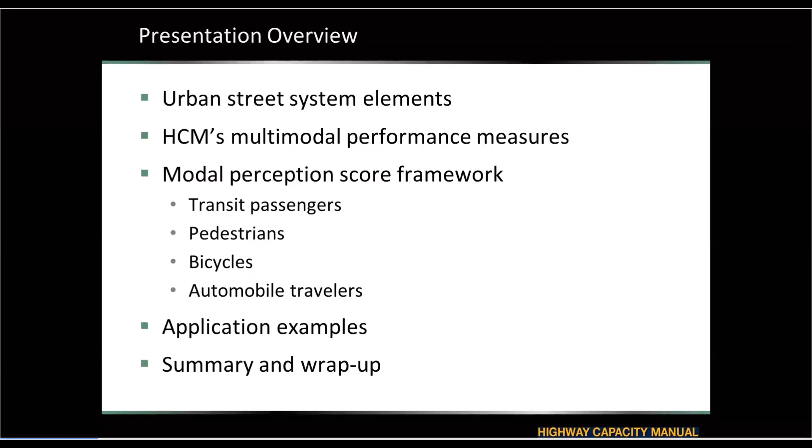Then we'll move on to looking at one specific performance measure, or set of performance measures, the modal perception scores that can be evaluated for transit passengers, pedestrians, bicycles, and automobile travelers. These perception scores are really the heart of the multimodal evaluation process in the Highway Capacity Manual, and what can be used to support a complete streets analysis.

Aaron will give some application examples. We have 3 case studies of how these measures have been applied to actual projects. Then we'll provide a summary of the webinar and information about future research needs and resources available for people who want to know more about this method.

So we'll start first by going through the different urban street system elements that are defined in the Highway Capacity Manual.

So there are 4 main types of urban street elements. Obviously, one of the things you can find along a street are intersections. They can be signalized intersections, stop-controlled intersections, roundabouts, interchange ramp terminals, and alternative intersections. These are all covered in chapters 19 through 23 in the Highway Capacity Manual. These are the focus of the next 2 webinars, numbers 6 and 7. So we won't go into great detail about intersections in this webinar other than to describe how they fit into a multimodal analysis of a larger urban street.

One step up in the hierarchy of urban street system elements are links, which are the section of street between major intersections. You can also do an analysis of what we call a segment, which is the combination of a link and a boundary intersection at the end of the link. And then finally, you can combine multiple consecutive segments together to evaluate the urban street as a facility. We've already looked at urban street reliability as part of webinar 4, and the final webinar in the series, webinar 8, will look at urban street facilities in more detail. So the main focus of this webinar will be on the links and segments, although we will also cover intersections and facilities to the extent that they are incorporated into a multimodal analysis.

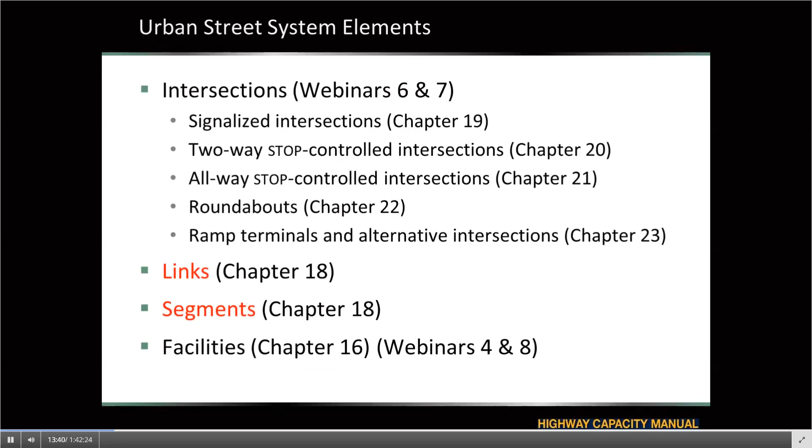So the first system element I want to talk about are boundary intersections. Boundary intersections divide an urban street into segments, and the HCM defines these as any intersection where traffic control can require the street's traffic to stop or yield. These are typically traffic signals, roundabouts, or all-way stop controlled intersections. In the case of the urban street in the aerial photo at the bottom of the slide, there are 2 signalized intersections that are the boundary intersections for this segment. We're going to use this particular section of street quite a bit during this first half of the webinar to demonstrate different aspects of the method and different definitions.

Now, this definition of boundary intersection does not include signalized crosswalks, signals at fire station driveways, railroad crossings, drawbridges, or other similar places where you might occasionally find traffic signals. And you might also say, well, what about crosswalks? Those can provide a legal obligation to traffic to stop or yield. And that is actually true, but for the purposes of the HCM definition, crosswalks do not create a break or a boundary intersection.

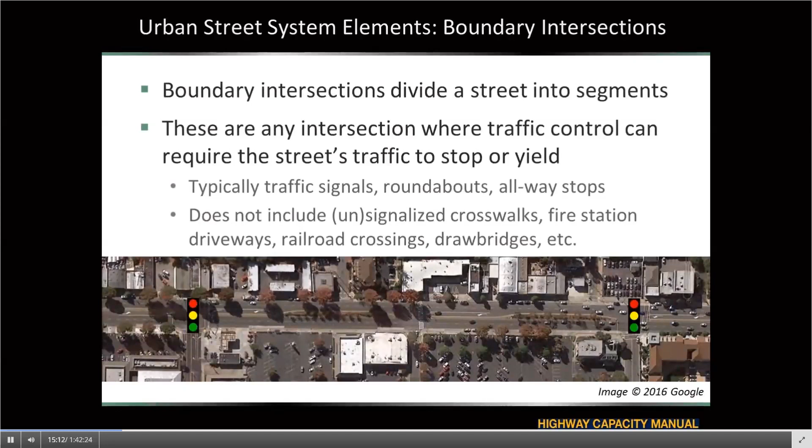Boundary intersections are just one kind of intersection that you can find along an urban street. And boundary intersections being the major intersections where both the major street traffic and the side street traffic may have to stop, the HCM allows you to analyze the operations of both the major street and the cross street. But there are other intersections along an urban street that aren't boundary intersections. These are, for example, intersections where only the side street is stop controlled. You also have a number of driveways typically along an urban street. At these locations, the HCM will allow you to analyze the turning movements onto and off of the major street, as well as movements crossing the major street, whether they're automobile or pedestrian movements. The analysis of intersections in general will be the topic of webinars 6 and 7.

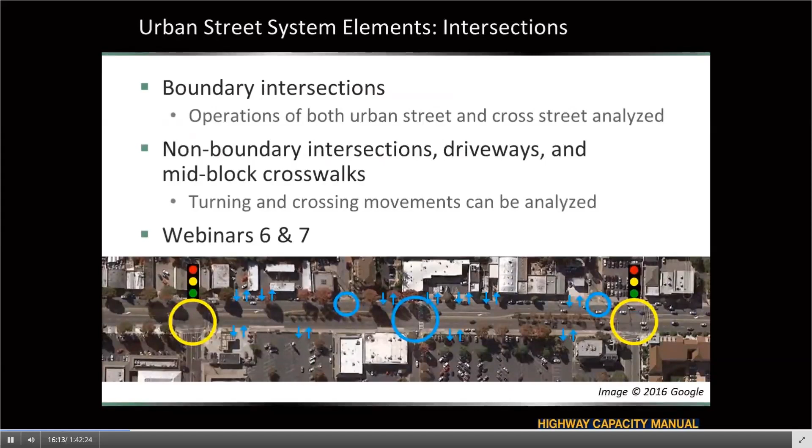Continuing on, the next type of system element are links. These are the portions of a street in between boundary intersections. As you can see here, we have links in both directions of the street. In this case, north is on the right-hand side of the picture. So we have a northbound link and we have a southbound link. It looks at the operation of the street in between the two signalized boundary intersections. Links, as we'll see, are particularly used in pedestrian and bicycle analysis, but not really for motorized vehicle or transit analysis.

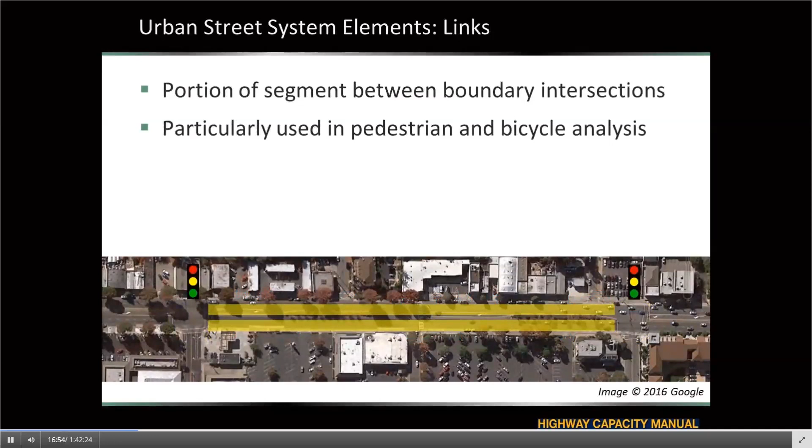And we can take links and their boundary intersections and combine them into segments. Segments are measured from the stop bar of one boundary intersection to the stop bar of the next boundary intersection. So you can see there's a little bit of difference depending on which direction you're looking at, which boundary intersection are you looking at in terms of evaluating the performance of the segment as a whole. So for the southbound, or right to left, portion of the street, we're looking at what happens when you are able to enter that first intersection, continue down the street, and then, for example, if you're looking at travel time down the street, how much delay do you experience at that downstream intersection before you can actually enter it?

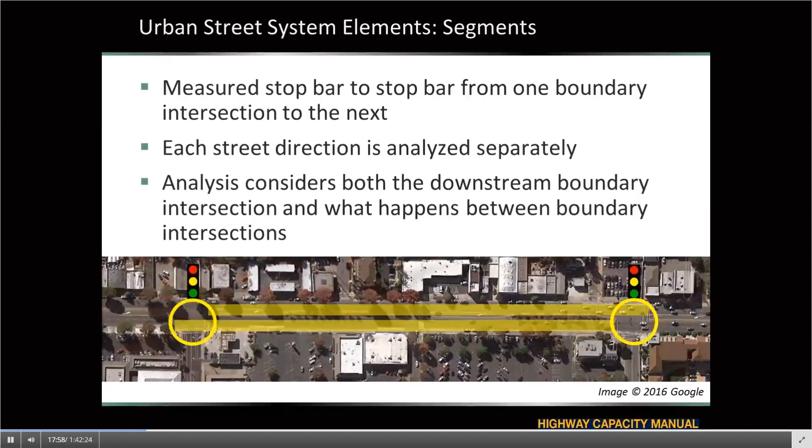For an urban street analysis, each street direction is analyzed separately for each mode. You can also combine multiple consecutive segments together to form a facility.

The general guidance the Highway Capacity Manual provides on starting a new facility is when a change occurs in one of these characteristics, or a significant change occurs: a change in the cross-section, particularly the number of through lanes, a significant change in traffic volumes, a change in the density of land uses along the urban street, or changes in the posted speed or vehicle speeds in general.

So here we have, for example, five segments that form a facility. We break the facility on the right-hand side because you have an adjacent freeway with ramps that change the traffic volumes along the street. You also have a rapid transit station there and some larger retail along the street than you have along the rest of the street, so it would be a good place to break the street and start a new facility.

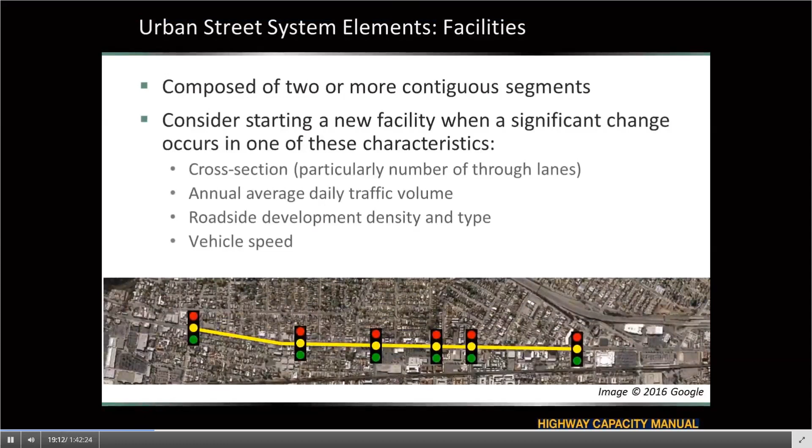Which system element should you study when doing an urban street analysis? The answer depends on what the study area is for the analysis and what the purpose of your analysis is. For example, if you're preparing an access management plan or conducting a multimodal corridor analysis, you would typically look at a facility and all of its sub-elements, the segments and the boundary intersections.

If you're doing a traffic impact study, you typically look at the intersections along the street, and depending on the requirements of the jurisdiction where you're performing the study, you might also need to look at segments.

If you're doing a district or citywide pedestrian and bicycle plan, you might just look at links if you're interested in evaluating the operation or quality of service of the pedestrian and bicycle network on a large scale, where you don't want to put a large amount of effort into any one street section, but want to look at a large area as a whole. You might look at links.

If you're doing a more narrowly focused plan, then you might also look at intersections and segments.

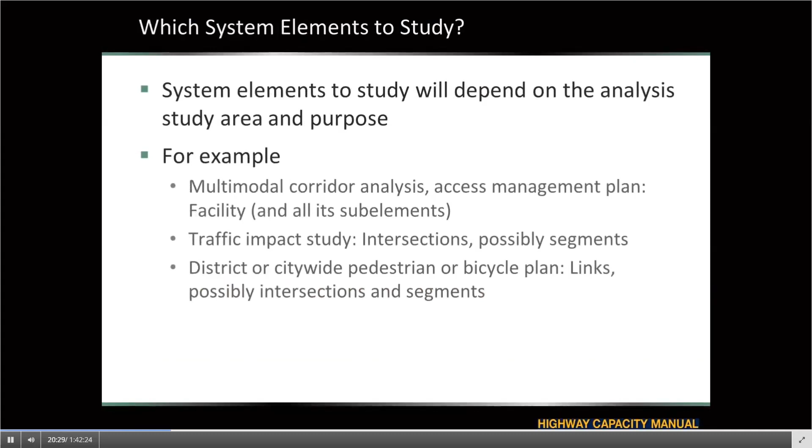Now that we've defined the different system elements that make up an urban street, we'll take a look at the full range of multimodal performance measures that the Highway Capacity Manual provides.

The HCM can also provide a level of service letter, and for some of the modes, it can provide other useful performance measures. So let's start off by looking at the motorized vehicle mode.

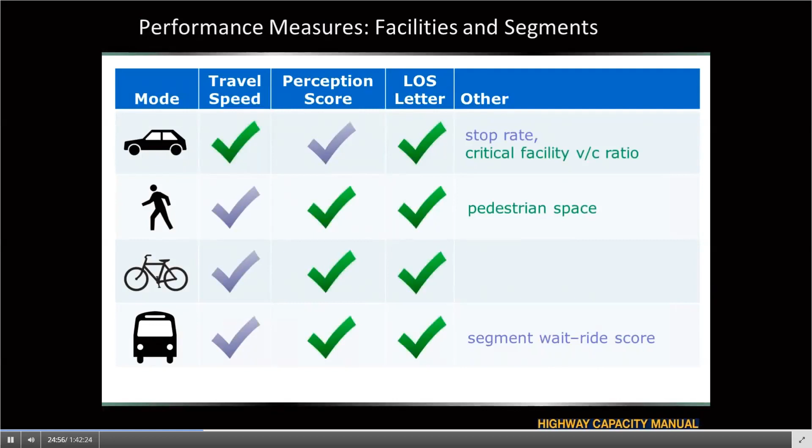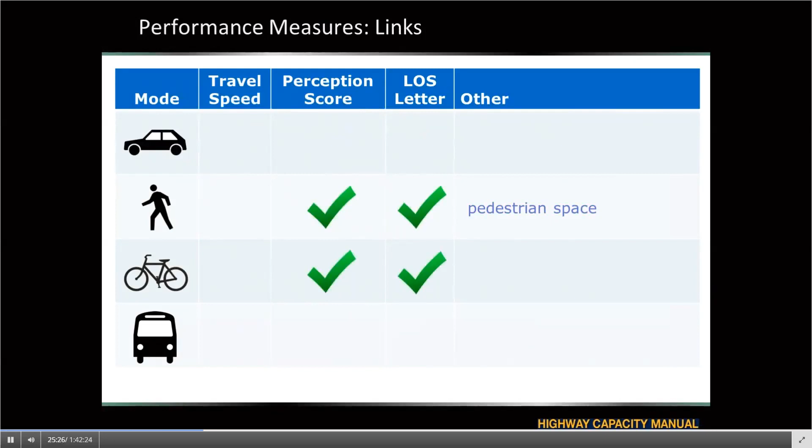Moving on now to the intersection measures. Now, when we look at intersections, the transit mode is combined with the rest of the motorized vehicle mode. So basically all the delay, for example, that the bus is experiencing is also experienced by all the passengers on the bus. So there's not a separate distinction made for the transit mode when we get to the intersection level.

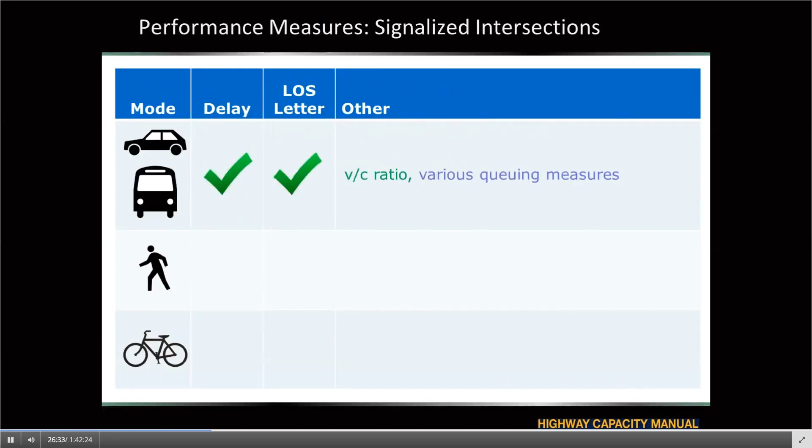So for buses and automobiles, the HCM can measure average control delay, and it can generate a level of service letter based on that delay. It can also calculate the volume to capacity ratio for the signalized intersection. Again, if that ratio is greater than 1, then the level of service is automatically F. And the HCM could also generate various queuing measures, like the average queue, the 95th percentile queue, the queue storage ratio, which is how much of the available queue storage, for example, in a left turn lane, is being used. So all those kinds of measures relating to queues can be generated for signalized intersections.

For the pedestrian mode, again, you can generate average control delay and a level of service based on that. You can also evaluate the amount of pedestrian space provided on street corners as pedestrians wait to cross the street, as well as within crosswalks. And there's a separate pedestrian perception score for signalized intersections. That gets combined with the pedestrian perception score for links to generate the overall pedestrian score for segments.

For bicycles, again, control delay and level of service based on delay, and a bicycle perception score for the signalized intersection.

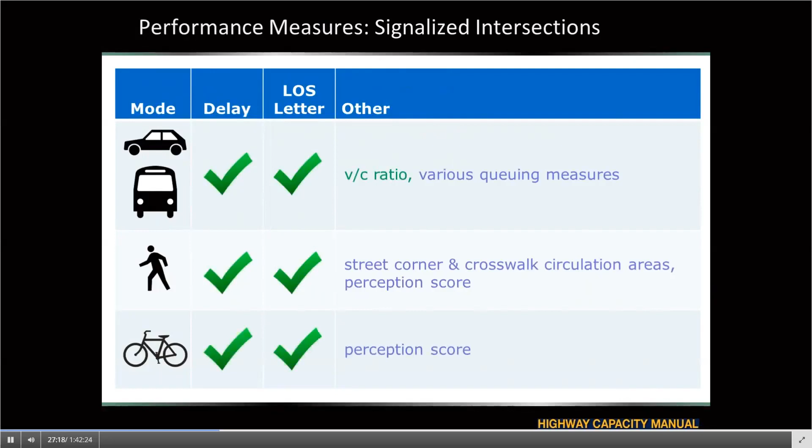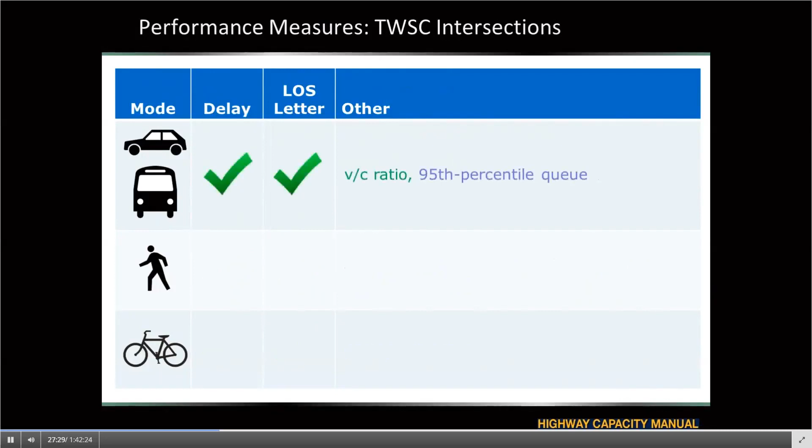For two-way stop control intersections, for automobiles and transit, you can calculate delay and the level of service based on that delay, a volume to capacity ratio, and the 95th percentile queue.

For the pedestrian mode, again, you can calculate average delay and level of service. You could also use the two-way stop control method for evaluating mid-block crosswalks, and you can also include driver yielding behavior effects as part of that analysis. So there's a table in the Highway Capacity Manual based on reported research on how often drivers yield for different kinds of crossing treatments, for example, flashing beacons. So a variety of different techniques can be used to draw attention to pedestrians potentially crossing the street.

You can also use more recent research than what's given in the Highway Capacity Manual if you have more recent or local data available. For the bicycle mode, for two-way stop control intersections, there's not been a lot of research done, and therefore the Highway Capacity Manual provides only limited guidance for how you can analyze bike operations at a two-way stop controlled intersection.

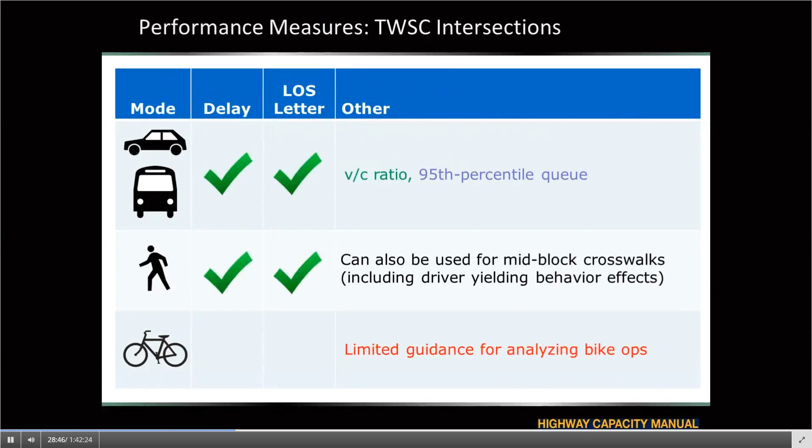All-way stop controlled intersections are fairly similar to two-way stop controlled intersections, except in this case there's also only limited guidance provided for analyzing pedestrian operations.

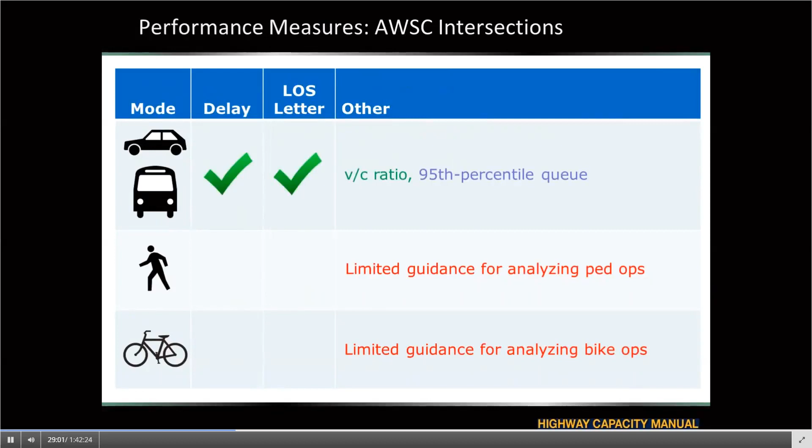So which performance measures might you use in analysis? The measures that you choose will depend on the analysis purpose and the study area environment. For example, measures based on pedestrian space or circulation area are useful for sizing pedestrian facilities in the downtowns of major cities and for special event planning. I've applied these measures to analyze narrow sidewalks near cruise ship docks in Alaska. So any place where you have large numbers of pedestrians, the space-based measures can be useful.

Calculating vehicle or modal delay is the starting point for determining person delay. If you're interested in the overall delay experienced by all users of an intersection, you can take the vehicle or per-bicycle delay generated by the HCM, apply an average vehicle occupancy, and then convert the vehicle delay into a person delay.

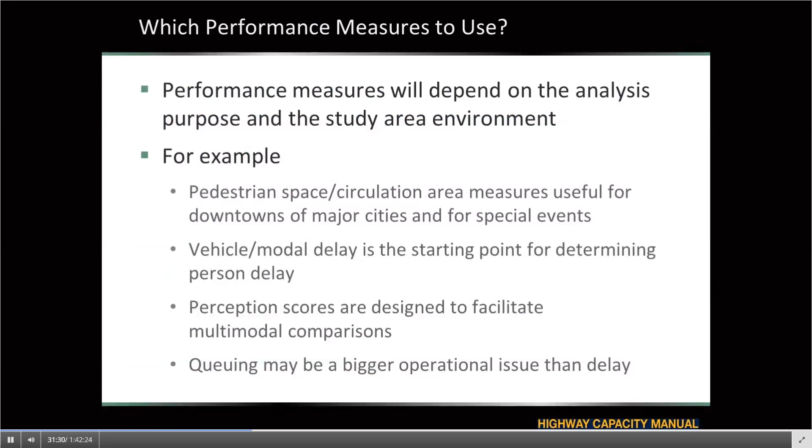Okay, now we've gone through the different performance measures that the HCM can calculate by mode for urban streets. Now we're going to focus in on the perception scores that the Highway Capacity Manual provides. I'm going to go through the general framework for those measures and cover the transit and pedestrian modes, and then I'll turn it over to Aaron to cover the bicycle and motorized vehicle modes.

The HCM's multimodal method was originally developed by NCHRP Project 3-70 in the mid-2000s. The development of this method is described in NCHRP Report 616, available on TRB's website. We'll also give you a link to HCM Volume 4 at the end of this webinar where you can download it. After it was developed, this framework was tested in a dozen or so different metropolitan areas around the United States, and this testing is described in NCHRP Web-Only Document 158. The purpose of the testing was to get agency feedback on the realism of the results coming out of the method, as well as feedback on how easy or difficult it was to apply. As a result of that feedback, some of the original measures were tweaked a little bit, and that's been reflected in the Highway Capacity Manual.

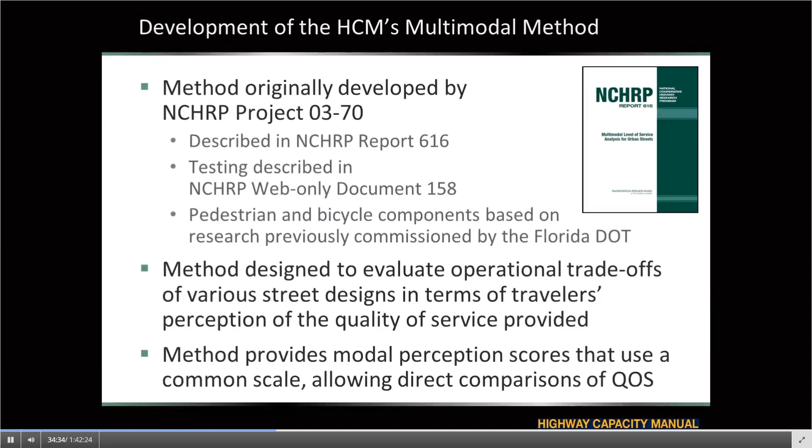Some quick background on how the method was developed.

For the pedestrian, bicycle, and automobile modes, video lab participants rated videos depicting various urban street environments. For example, for the pedestrian mode, there would have been different sidewalk widths, or maybe not even a sidewalk at all, different levels of traffic adjacent to the sidewalk, different levels of buffering between the sidewalk and traffic, and so on.

Participants were asked to rate service quality on an A to F scale. They were also instructed to look just at what was happening within the street and not what was happening on the side of the street, such as adjacent land use—if you have really nice building facades or something like that, they were instructed to ignore.

The purpose of these particular measures is to look at what's within the right-of-way and what's within the direct control of a transportation agency. Regression analysis was used to identify relationships between the various urban street characteristics and participants' ratings, taking a look at which factors were significant in affecting participants' quality of service ratings and the degree to which these factors were significant.

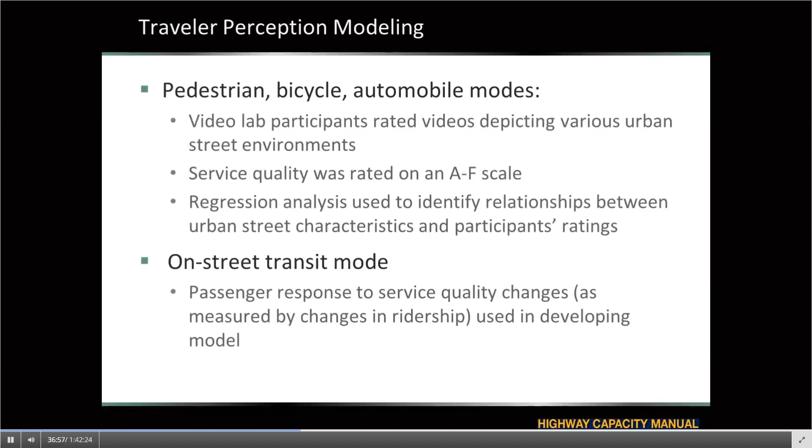The HCM's models predict traveler satisfaction with conditions on an urban street. These perception scores are open-ended, so they can actually go negative or they can get very high, but in general, lower scores mean better perceived service quality.

To give you a sense of the typical range these scores fall within, for segments, a score less than or equal to 2 equals level of service A, and a score greater than 5 equals level of service F. So you can get scores much lower than 2 and much higher than 5, but typically they'll fall into a fairly narrow range between, say, 1 and 6.

The pedestrian, bicycle, and transit scores can be used to determine level of service for those modes. In contrast, the motorized vehicle score is only used for comparison with the other three modes, and travel speed is used to determine motorized vehicle level of service.

The reason for this comes out of the testing for NCHRP Report 616, where it was found that a number of agencies already used travel speed-based level of service for urban streets and really didn't want to change their standards to fit this new perception score.

So for the time being, this motorized vehicle score is used for comparison only with the other modes, but it does use the same scale that the other modes use. So you can still get a direct comparison and still see how much the score goes up and down as conditions on the street change.

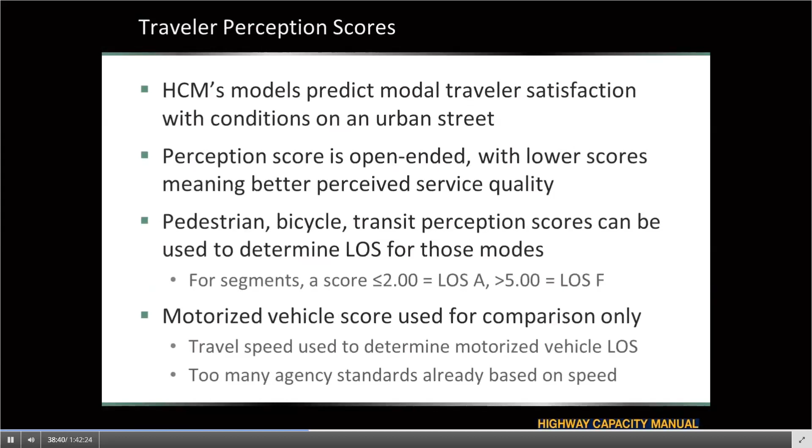Now I'll move on to the transit mode. In an HCM context, transit is really only evaluated at the segment and facility level, and the only kinds of transit service that are looked at are those that operate on the urban street.

So typically bus, streetcar, and on-street running portions of light rail lines. So if you have a rapid transit line that runs under or over the street, it does not get analyzed using this method. Only modes operating on the street can be analyzed with this method.

Also, this particular method is intended to be used alongside the pedestrian, bicycle, and auto perception scores. So if you want to look at other kinds of performance measures for transit, the HCM refers you to the Transit Capacity and Quality of Service Manual, a companion document that provides a wealth of methods and measures specific to the transit mode. For the HCM, the transit mode is only covered to the level needed to provide a fair comparison with the other modes operating on an urban street.

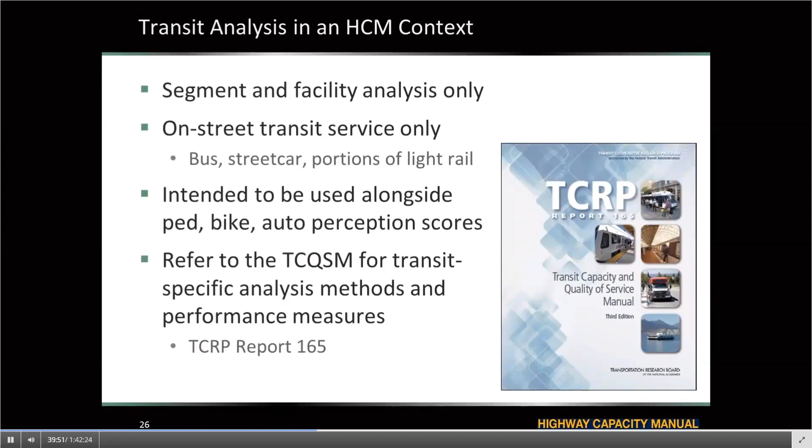In terms of looking at how the perception score is determined for a segment, the key components of service quality are service frequency, how often the bus arrives, and a perceived travel time rate, which incorporates both the actual bus speed in minutes per mile, as well as reliability, how much extra time do you have to wait at the stop past the scheduled time before the bus arrives.

Onboard crowding is another factor, because research has found that time seems to pass more slowly and it's more uncomfortable to travel on board a crowded bus versus an uncrowded bus, and that affects the perceived travel time. Having amenities at a bus stop, such as a shelter or a bench, helps make the time go by a little faster compared to having to stand at the bus stop. So all those factors go into determining a perceived travel time rate.

Finally, pedestrian level of service is also a factor in determining transit level of service. If you have very good pedestrian facilities leading to the bus stop, that provides a better transit level of service, all other things being equal. Similarly, if you have very poor or non-existent pedestrian facilities, that will lower the overall transit level of service. As a result, transit measures service quality for passengers getting to the bus stop, waiting for the bus, and on board the bus as it goes down the urban street segment.

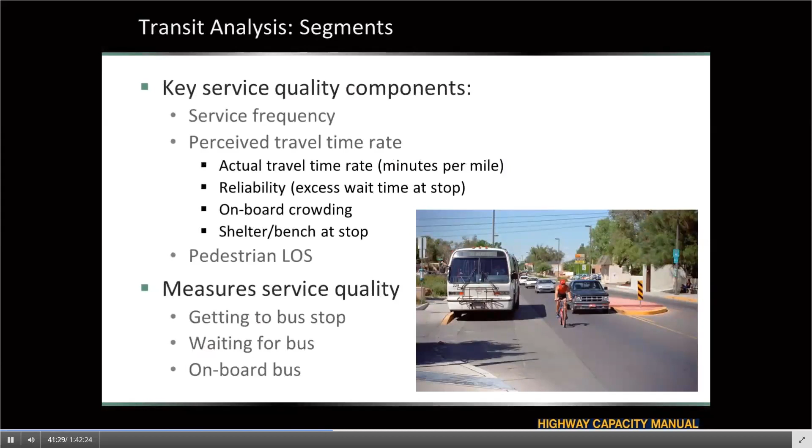Looking at the facility level, the transit facility perception score is just a length-weighted average of all the segment scores, and this can be converted to a level of service letter.

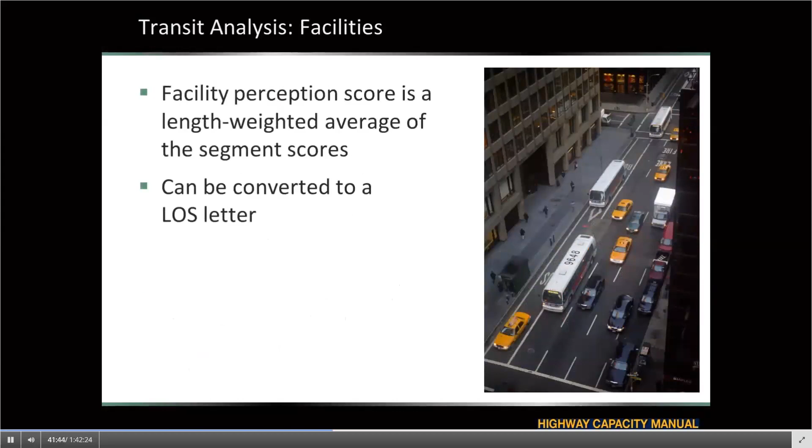For pedestrian analysis, I'm going to run through some of the key service quality components now. One of these is sidewalk width, and we set that to 0 feet if there is no sidewalk, but we can still evaluate the pedestrian perception score even without a sidewalk. Typically it will be pretty bad.

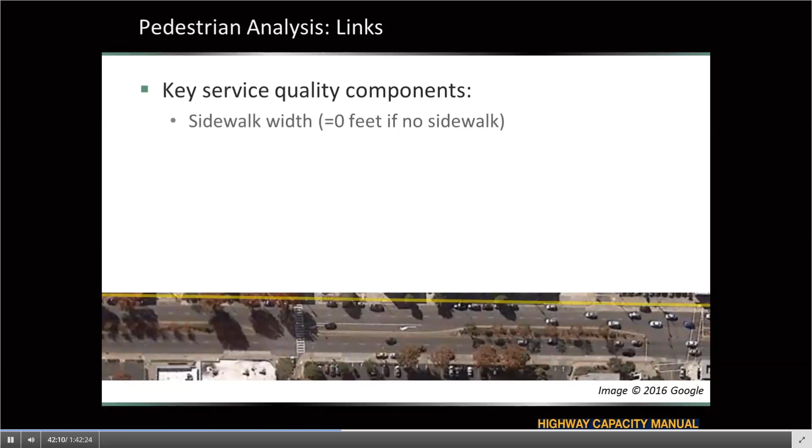Another factor that goes into pedestrian analysis is the separation from motorized vehicle traffic, which looks at the width of the bike lane if one's present, the width of the parking lane if one is present, and the width of any landscape buffer between the curb and the sidewalk.

Another factor is barriers that also help buffer the pedestrian facility from motorized vehicle traffic. This could be, for example, occupied on-street parking, street trees, or any other kind of continuous or semi-continuous barrier that provides a buffer effect.

Another factor is traffic volume and speed in the outside through lane. The more traffic and the faster it goes, the worse the pedestrian perception score will be, and the worse the pedestrian level of service will be that's derived from that score.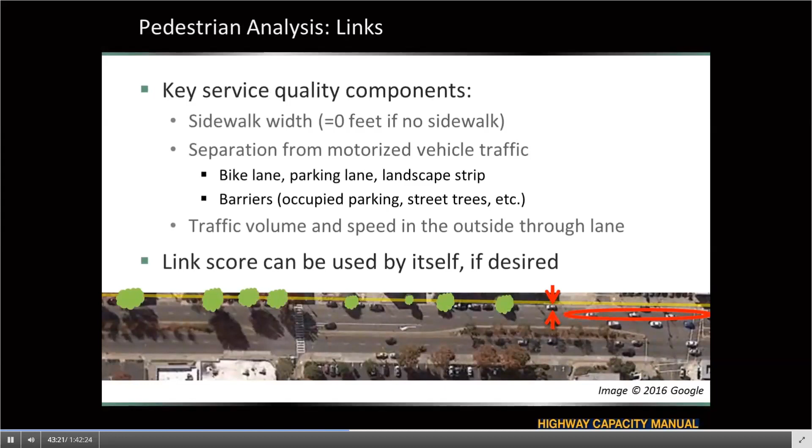Now the link score can be used by itself if you want to, or you can combine it with intersection scores to generate a score for a segment or for a facility.

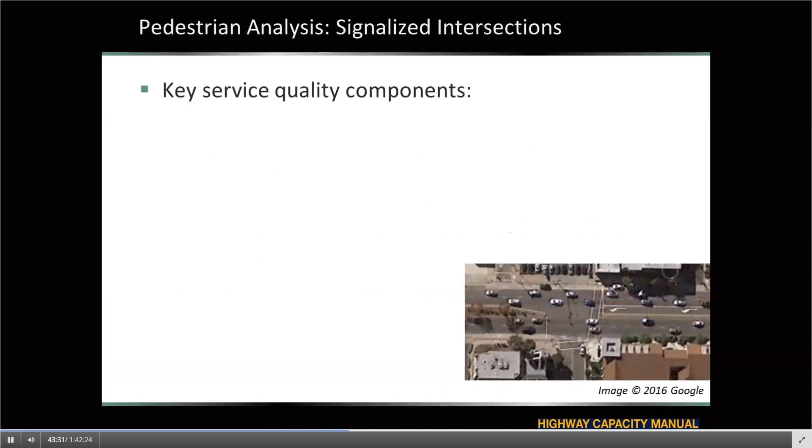Looking now at signalized intersections, the key factors that affect the pedestrian perception score include the number of traffic lanes that are crossed on a given crosswalk, and you can calculate the score for all the crosswalks at the intersection.

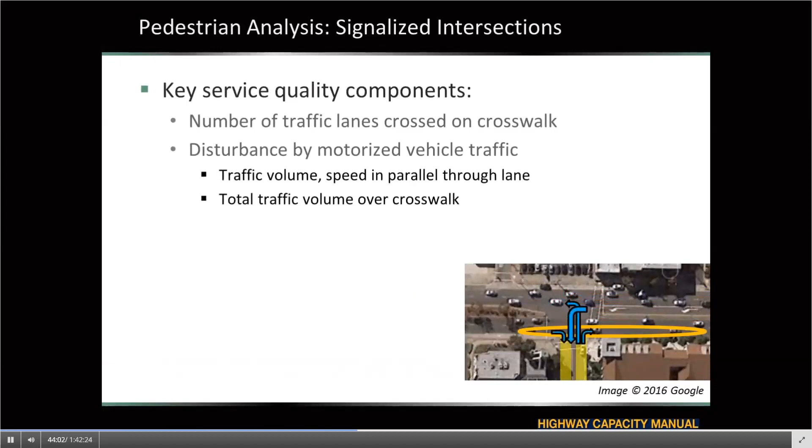Another factor is how much pedestrians are disturbed by motorized vehicle traffic while waiting to cross and as they're crossing the crosswalk. This includes things like traffic volumes and speeds in the parallel through lane, the total traffic volume that goes over the crosswalk, and also the permitted left turn and right turn on red volume that goes over the crosswalk.

Another factor, which isn't present at this particular intersection, is the number of right turn channelizing islands that pedestrians pass over as they cross the street.

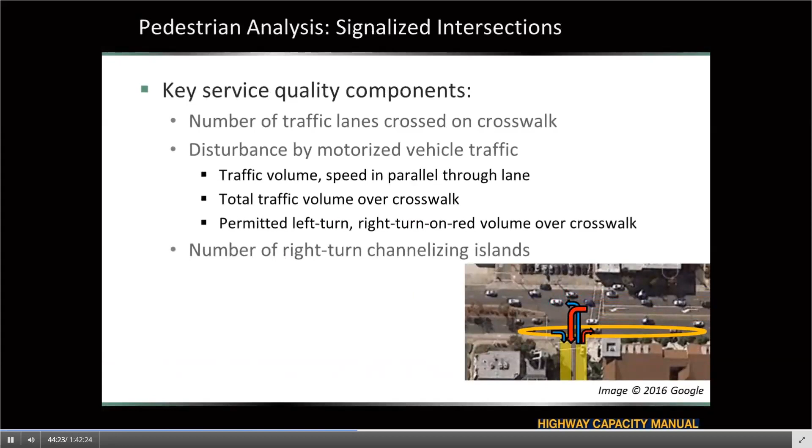Now for segments, the perception score combines both the link and intersection perception scores, but adds one additional factor, which is the difficulty of crossing the street—how much of a barrier is the street for crossing?

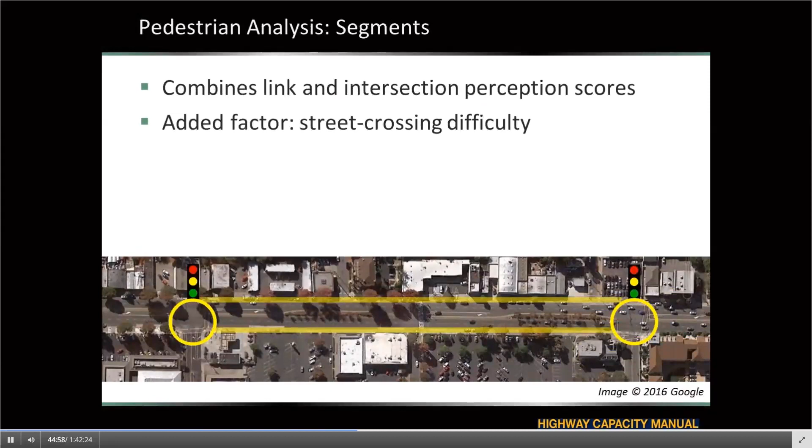Obviously at the boundary intersections you can use the signal to get across the street, but what if you're in the middle of the street, for example at this crosswalk here? What the method looks at is how much delay you experience crossing at a legal crossing point, and then compares that to the average delay of diverting to one of the boundary intersections to get across the street.

Where it says the worse of the delay, it actually should be the lower delay—the better delay in this case. That's a little typo there. But the lower delay crossing the street is what goes into street crossing difficulty.

As I had said earlier, pedestrian space can also be used to determine level of service, but again, this is only a factor on sidewalks that have really high pedestrian volumes, over 1,000 pedestrians per hour.

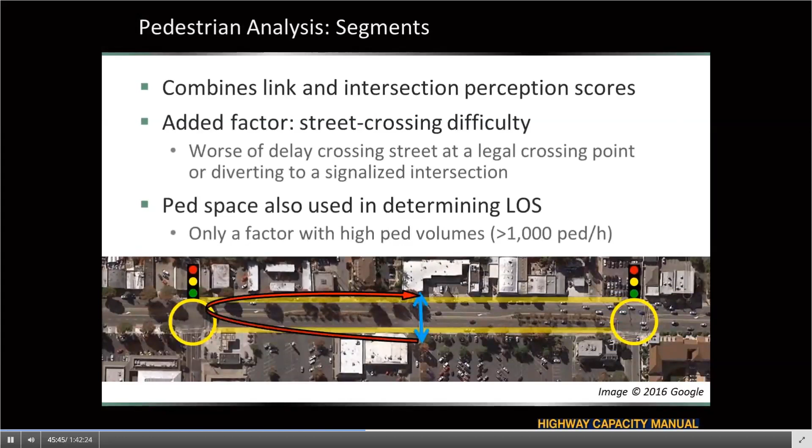Going on to facilities, similar to transit, the facility score is a weighted average of the segment scores. In this case, it's a travel time weighted average, so the segments you spend more time in get weighted more heavily than the ones you spend less time in. This is a change from the distance-based weighting used in the Highway Capacity Manual 2010.

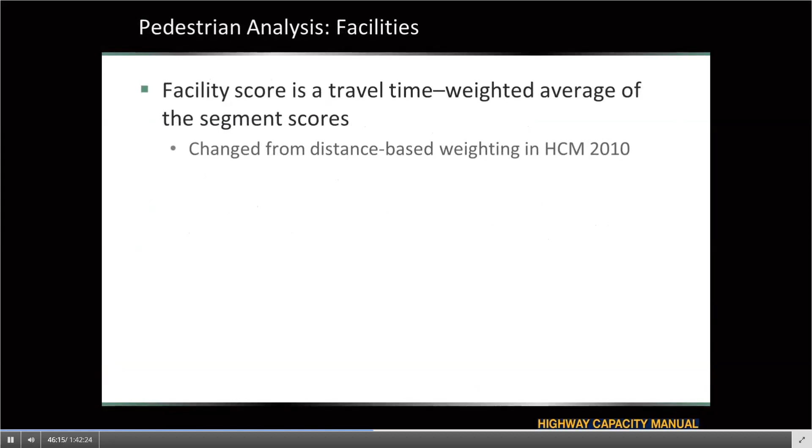A few other changes were made for pedestrian analysis. One is the definition of the pedestrian body ellipse, which shows up in Chapter 4 of the manual. The body depth element used for estimating pedestrian space has been increased by 2 inches to account for changes in the U.S. population between the 1970s and the 2010s.

The basic concept of a body ellipse is that it looks at the space taken up by a 95th percentile adult male wearing winter clothing and carrying some sort of small object like a bag or briefcase, with a little additional buffer so that if the person sways slightly while standing still, they won't contact the person next to them. Because of changes in the body shapes of adult males in the U.S., the body depth has been made 2 inches bigger.

Again, the facility and segment pedestrian level of service scores are weighted by travel time and delay. There's also been incorporation of clarifications and errata that had come up with the HCM 2010 related to link-only analysis and some definitions of intermediate calculation variables.

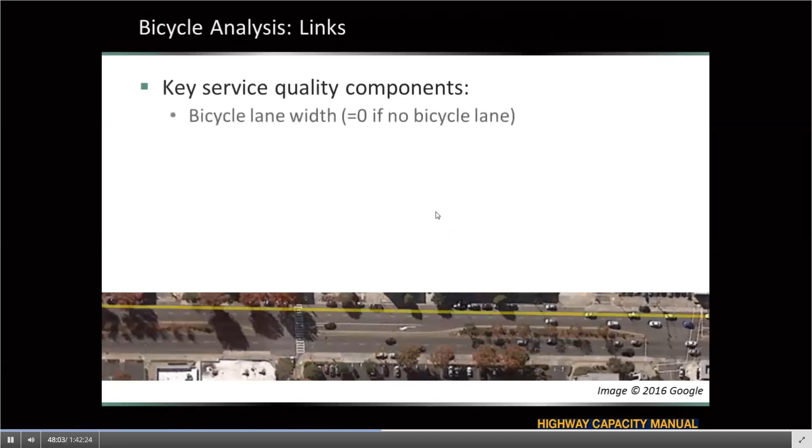For the bicycle link analysis, the components that have the largest effect include the presence of a bicycle lane. Wider bicycle lanes also result in a better score than just adding the bike lane. Amount of separation between the bicyclist and the closest travel lane matters too — the more separation provided between the bicyclist's travel path and that outside through lane, the more comfortable they will feel.

Traffic volume, speed, and vehicle classifications of the lane closest to the bicycle also matter. As traffic volume, speed, and percentage of heavy vehicles go up, the bicyclist's perception of that particular link will go down.

Occupancy of on-street parking is another factor. Sparsely used on-street parking is a benefit to bicyclists as it provides more room. The more heavily used that parking is, the more of a drawback it becomes, because bicyclists have to worry about parking maneuvers, and the parking lane can no longer be used as excess room.

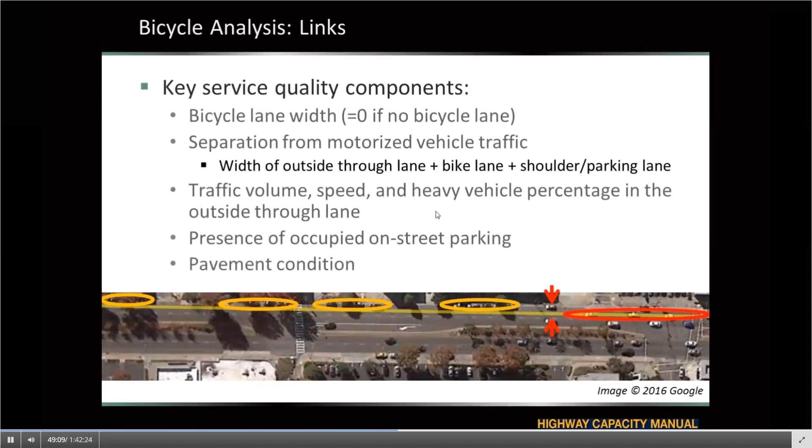The final primary factor is pavement conditions. Bicyclists really prefer smoother pavement, even more so than vehicles, since they lack shock absorbers. Improving poor pavement quality will result in one of the biggest improvements to the bicycle link analysis result.

Bicycle service quality at intersections is influenced primarily by three factors: cross-street width, bicycle separation through the intersection, and parking maneuvers within 250 feet of the intersection. For cross-street width, wider intersections are often more challenging to cross for bicyclists, so as intersection size increases, the bicyclist's perception of the experience through that intersection decreases.

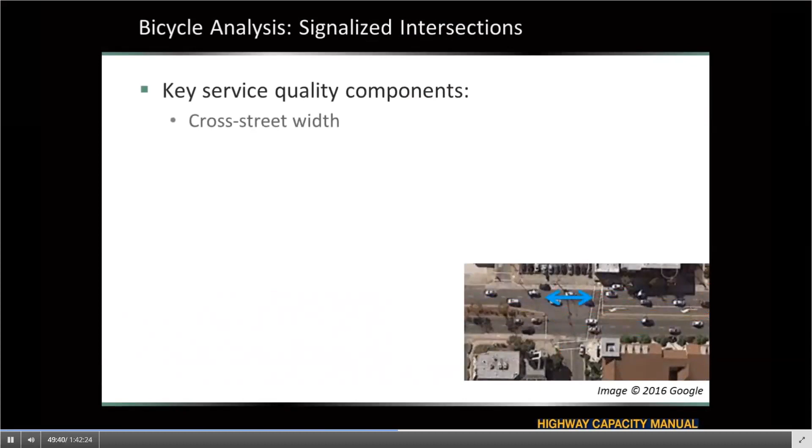The effect of bicycle separation through the intersection and parking occupancy is similar to the link results, where bicyclists prefer additional separation from motor vehicle traffic and fewer conflicts with parked vehicles. As separation decreases and parking occupancy increases, the bicyclist's perception of the experience through the intersection is going to degrade.

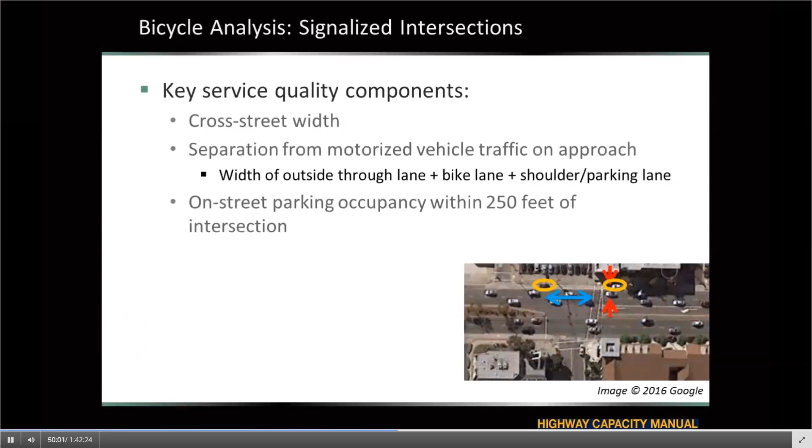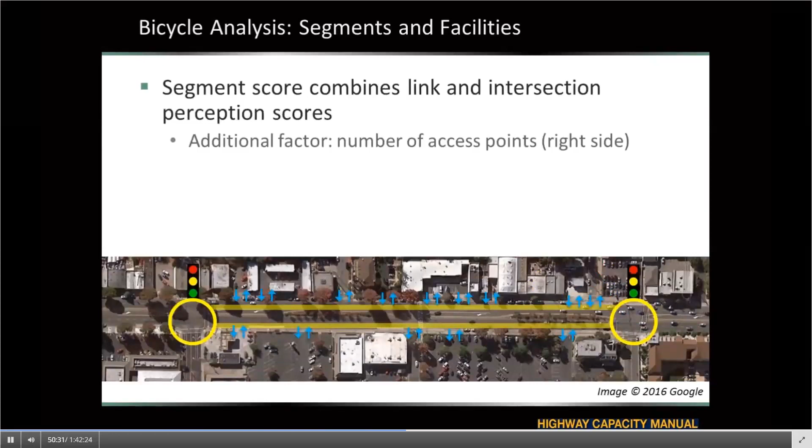Similar to the pedestrian segment score, the bicycle segment score is a combination of the link and intersection findings. However, there is an additional factor in the bicycle method: the number of access points on the right side of the road. Access points in this context are locations generating a large amount of traffic that create significant conflict points bicyclists need to watch for — for example, a two-way stop-controlled side street or a driveway into a large commercial development such as a grocery store.

Like the HCM 2010, the bicycle facility score is a weighted average of the segment scores. Unlike the HCM 2010, though, the segment scores are now weighted by travel time rather than strict segment length.

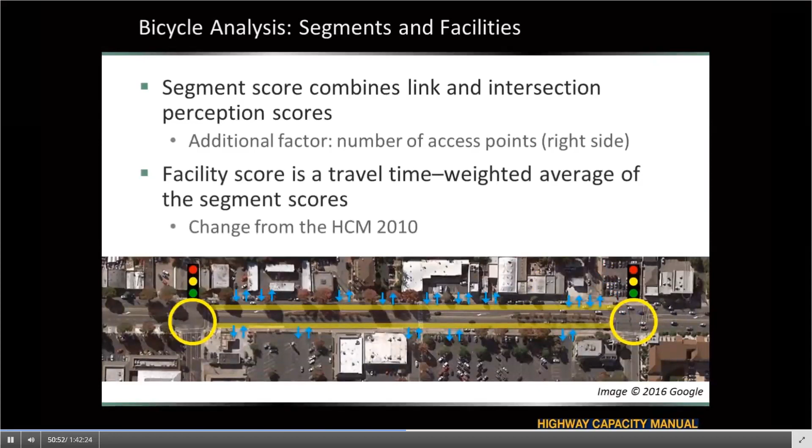The HCM 2010 was the first HCM edition to actually have the bicycle urban street methodology. While much of the method is similar in the new 6th edition, there have been a few tweaks. This includes the facility score, which was changed to reflect travel time rather than segment length as the weighting factor. Other changes include tweaks to capture clarifications in errata, and link-only analysis now uses a level of service scale from the original research rather than the segment scale, to better capture the bicycle experience on the link.

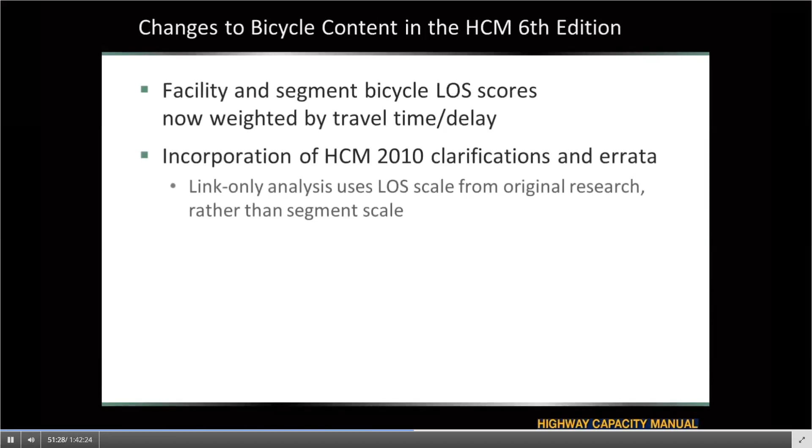In addition to providing a perception score for transit passengers, pedestrians, and bicycles, the HCM also provides the automobile traveler perception score, as Paul was discussing earlier. This performance measure is not the official level of service metric for vehicles on an urban street, but it does allow for a more direct comparison with the other three modes.

It is only available at the segment and facility level and is based primarily on lane configuration at the downstream intersection, which would result in how many stops per mile that automobile might take while traversing the corridor.

So now that we've covered a bit about what goes on under the hood of the multimodal analysis methods for urban streets, I'll share with you a couple of example applications of how you might be able to use these methods. We'll then summarize what we have covered and have some time for any questions you might have at the end.

I'll cover three potential applications of the multimodal methodology. First, we'll look at how it can be used for what we call here in California a general plan, but other states call it a comprehensive plan. I'll then present how the city of Jacksonville, Florida used the pedestrian method to develop more of a baseline data set for the region in terms of pedestrian level of service for different corridors. And finally, I'll present a road diet application where it was used to assess impacts of a road diet to the four different modes.

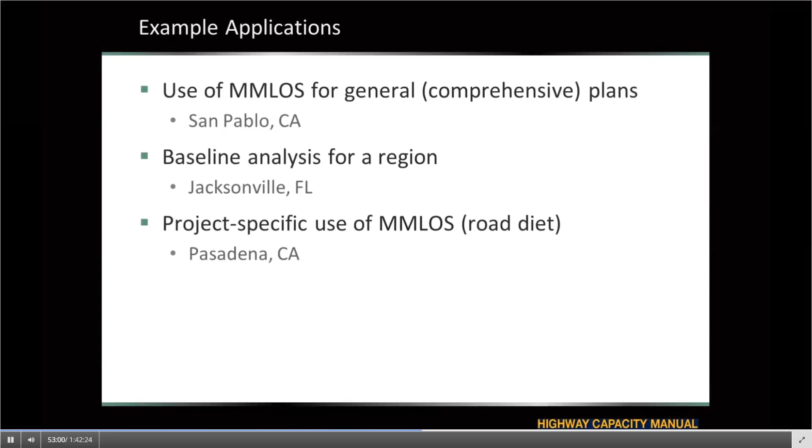So the first application is how to use the multimodal methods described to assist in transportation planning. This work was done for the city of San Pablo here in the San Francisco Bay Area for their 2030 general plan, where they wanted to incorporate more complete street policies into their guidelines.

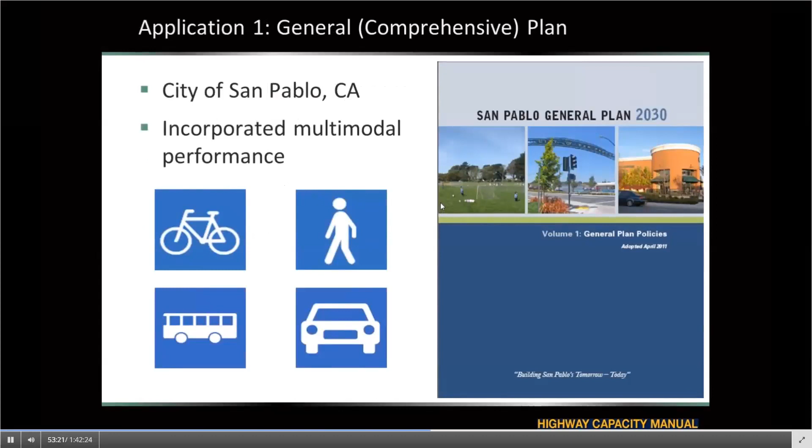To incorporate these complete street policies, the city wanted to move away from developing roadway classifications based on how many vehicles it would carry and develop more multimodal designations. Therefore, the typical arterial and collector designations were replaced with mixed-use boulevards, urban arterials, auto arterials, and avenues. The preferred right-of-way configuration for each designation was then defined within the plan.

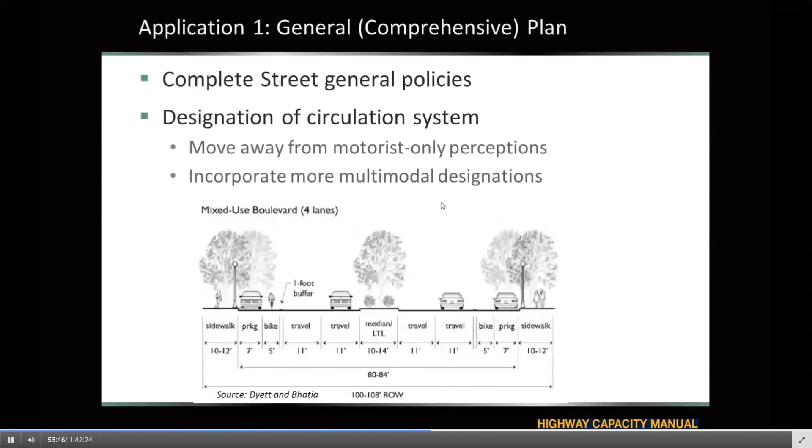In total, they came up with six different classifications of roadway, which would include state highways, auto arterials, urban arterials, mixed-use boulevards, avenues, and local roads.

Auto arterials, for example, are defined as two- or four-lane facilities that prioritize vehicles. Bicycle and pedestrian movements are secondary but not prohibited, and sidewalks are required on at least one side of the roadway. Mixed-use boulevards, for example, provide access to retail, commercial, and high-density residential land uses, while facilitating traffic to the freeway network and through the city.

All modes of travel share the roadway, but vehicle and bicycle access are not as high a priority as transit and pedestrians.

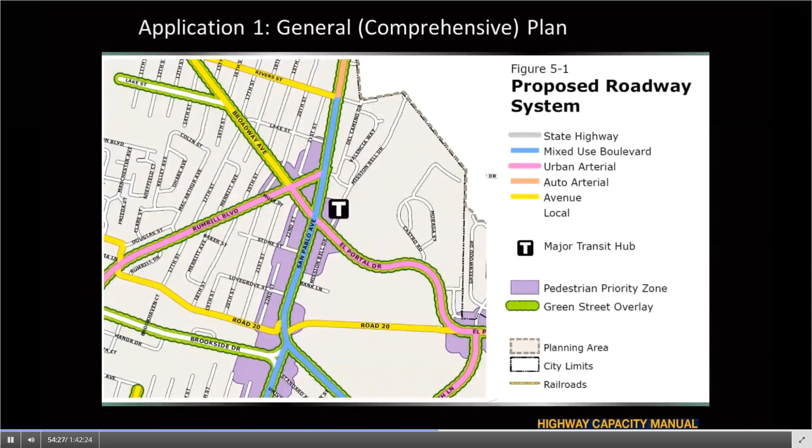With a new hierarchy that allows the city of San Pablo to prioritize modes other than the auto, a new methodology that could compare the various modes on an equal footing was needed. Therefore, the city used the multimodal methodologies described today to provide an analysis tool to assess whether proposed changes to the transportation system followed the new guidelines for prioritizing different modes depending on the roadway's designation.

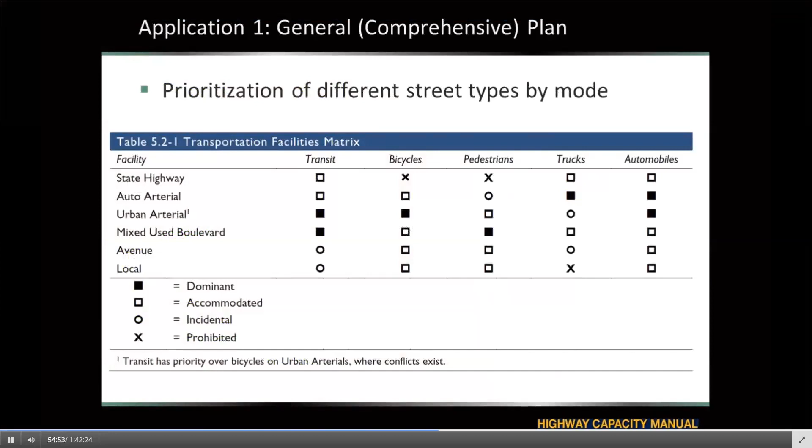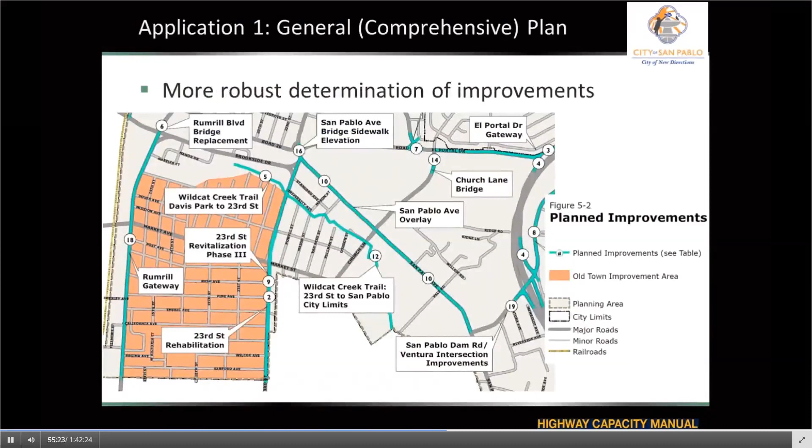The multimodal methodologies could then be used to look at different roadway improvements and prioritize those that better met the goal of that individual facility. A mixed-use boulevard, for example, prioritizes pedestrians, so implementation of pedestrian improvements such as curb extensions, crosswalks, and rectangular rapid flashing beacons would take priority over auto and bicycle improvements like adding turn lanes or a bicycle lane.

So the benefits of using the multimodal methods described on this project allowed for an evaluation of baseline level of service results for all travel modes and the ability to set reasonable level of service standards for the four modes: automobiles, pedestrians, bicyclists, and transit passengers. Multimodal roadway designations could be set while the multimodal methods were used to prioritize roadway improvements and better inform mitigation measures for any future development that might come along near these streets.

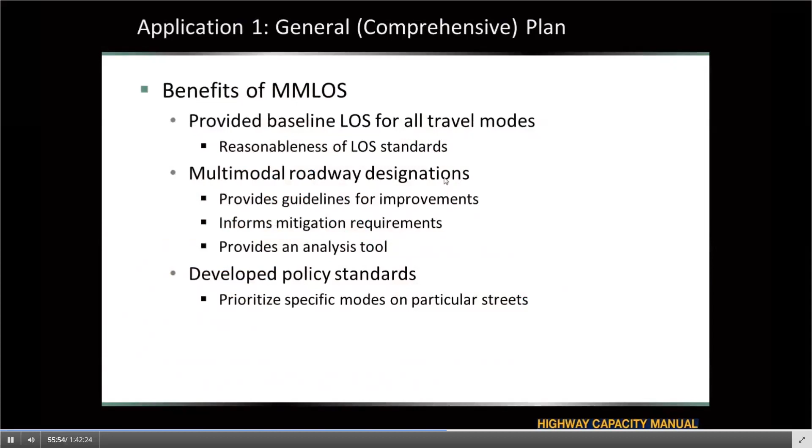The second application was performed for the city of Jacksonville, Florida as part of their 2030 mobility plan. The city has been ranked as one of the most dangerous cities in the country for pedestrians, so in order to prioritize where to make improvements to the pedestrian infrastructure, the city first needed to determine what the current conditions were on all the major roadways within the region.

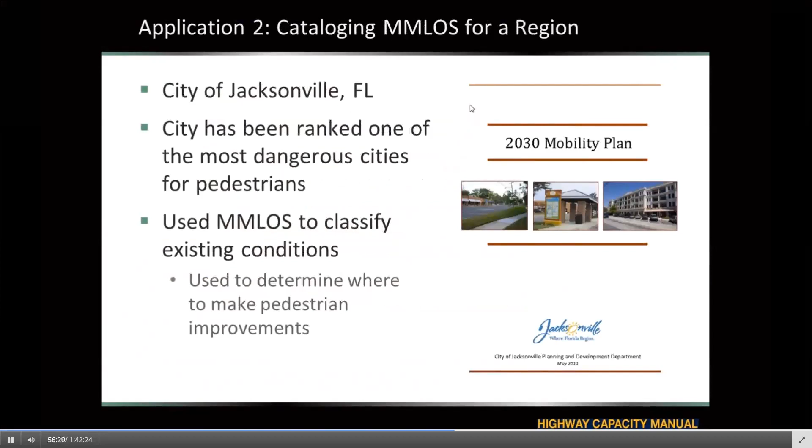Jacksonville ran the pedestrian multimodal level of service analysis on each of the major streets within the city and then mapped the results in a color-coded graphic. Using a combination of this database and other information, such as collisions, allowed the city to determine where the need for pedestrian improvements is greatest. This allowed for more targeted improvements where tight financial resources could yield the biggest returns.

Our third and final case study comes from the city of Pasadena, California, and is a project-specific application focusing on a road diet for Orange Grove Boulevard. The multimodal methods were used to quantitatively assess the trade-offs among the vehicle, pedestrian, bicycle, and transit modes that would occur by removing a travel lane in each direction in order to implement bicycle lanes.

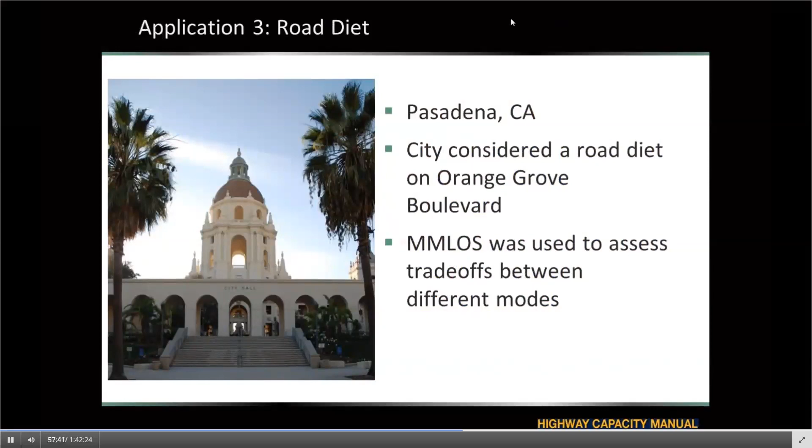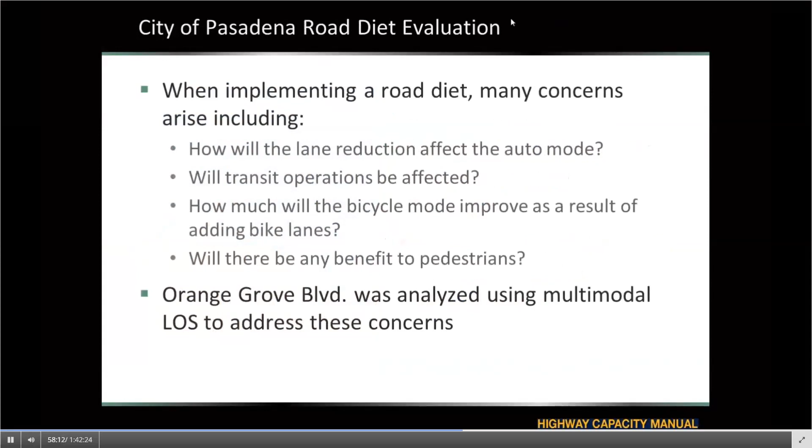The way we came about finding the multimodal methodology for the city of Pasadena was really wanting to have a quantitative method to address the concerns of various stakeholders on the corridor, including how much the auto mode would be affected by the reduction in lanes and what the corresponding improvement to the bicycle mode would be. Basically, is it worth it to take off a vehicle lane in order to improve bicycle access? Additionally, they wanted to see if there were any effects on pedestrian or transit mode as a result of this road diet.

As background for the proposed road diet, Orange Grove Boulevard is about 1.6 miles between North Hill Avenue and Sierra Madre Boulevard, with a total of 4 travel lanes and an average daily traffic volume of about 11,200 vehicles. With 11,200 vehicles, it appeared to be a good candidate for a road diet, based on the rough rule of thumb that 1 travel lane in each direction should be able to carry about 20,000 vehicles per day.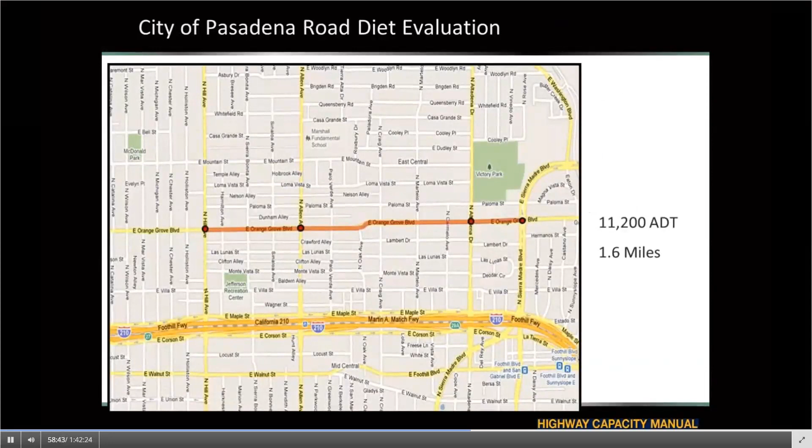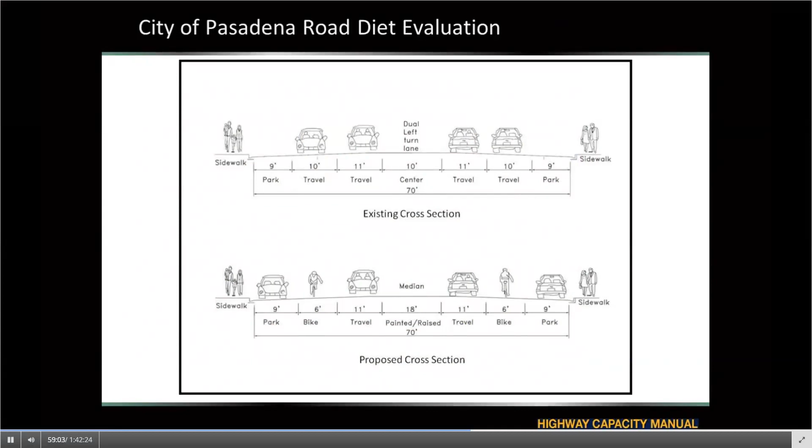The total cross-section of the roadway is about 70 feet curb to curb. Today, this space is allocated as a 2-way left turn lane, 2 travel lanes in each direction, and shoulder parking on both sides. The road diet would remove a travel lane in each direction and replace it with a bicycle lane, with the remaining space devoted to a slightly wider median.

As you can see from the picture, the real primary issue with Orange Grove Boulevard in this area is that it has a significant amount of right-of-way for a relatively light traffic volume. The wide street leads to higher auto speeds that can make biking uncomfortable due to the lack of designated bicycle facilities. Additionally, the wide roadway width detracts from the neighborhood feel of this street, which actually has single-family homes on both sides of the roadway.

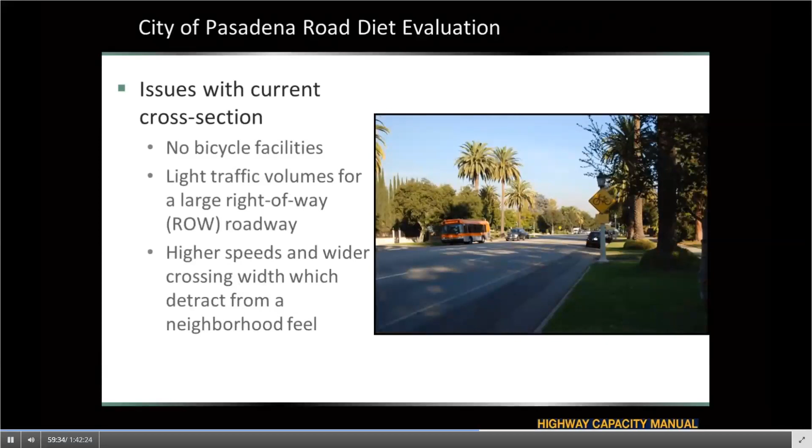This picture provides a view of what the bicyclist perspective is like. The 10-foot outside lanes and higher vehicle speeds can make it a little uncomfortable for the bicyclist. In this section it seems okay because they're riding in the shoulder where the parking is, but if you move up the street a little bit, there's actually a car parked there, so this would require the bicycles to merge over and conflict with motor vehicle volumes.

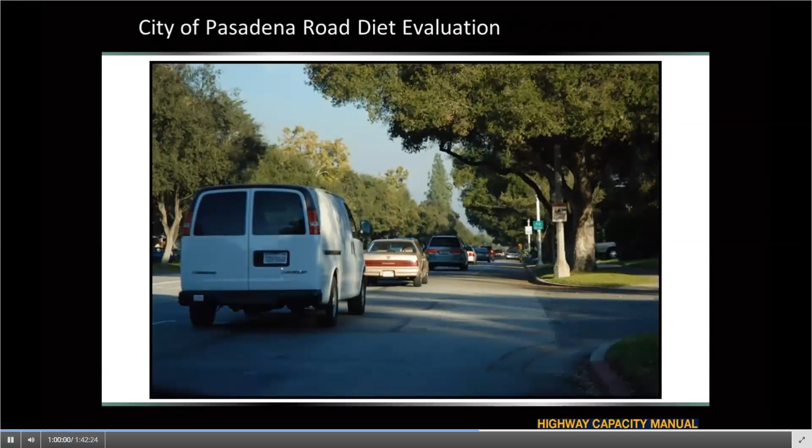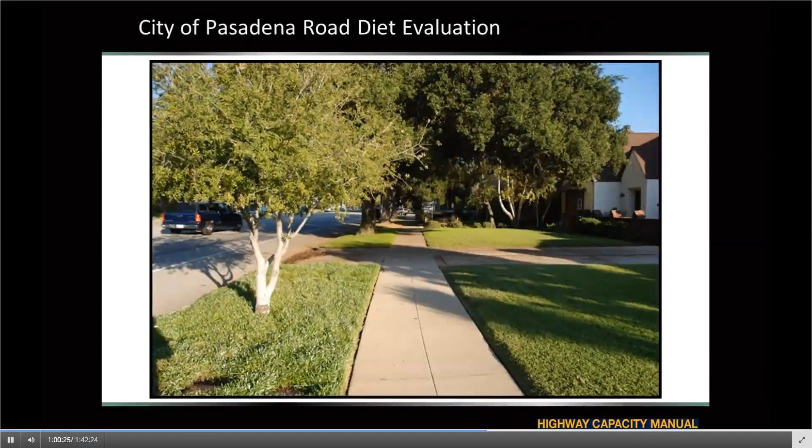The pedestrian experience is a little better than the bicyclist's. The shoulder parking and street trees actually help provide physical separation and a physical barrier between the pedestrian and the higher speed vehicle traffic. However, these higher vehicle speeds do have a negative impact on pedestrians walking along the corridor. Nobody really wants to walk along a high-speed corridor in the middle of a residential neighborhood.

So how would the road diet on Orange Grove Boulevard affect the various modes? Well, the auto mode, as anticipated, became worse. However, the perception score only increased by between 6 and 10%. This worsening was primarily the result of slowing down the vehicle due to having one travel lane rather than two.

The transit mode showed a slight improvement to the transit perception score of about 1%, so it's fairly flat. Transit passengers were negatively affected by the decrease in auto speed, since the bus is now going slower on its route. However, they were positively affected by the improvement to the pedestrian environment prior to accessing the bus, since all transit passengers start out as pedestrians.

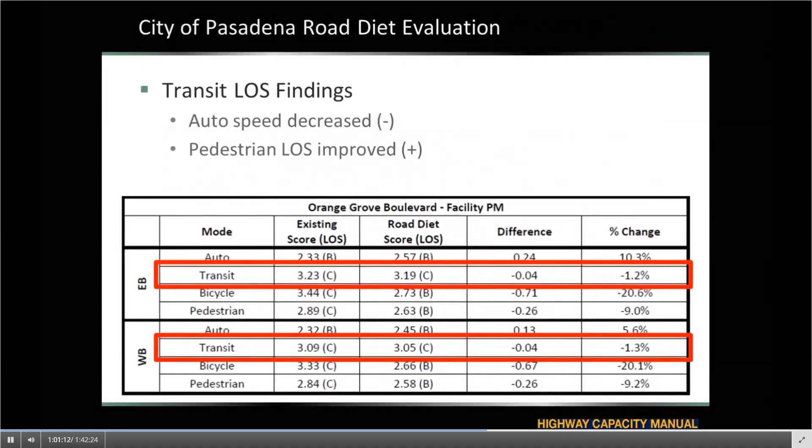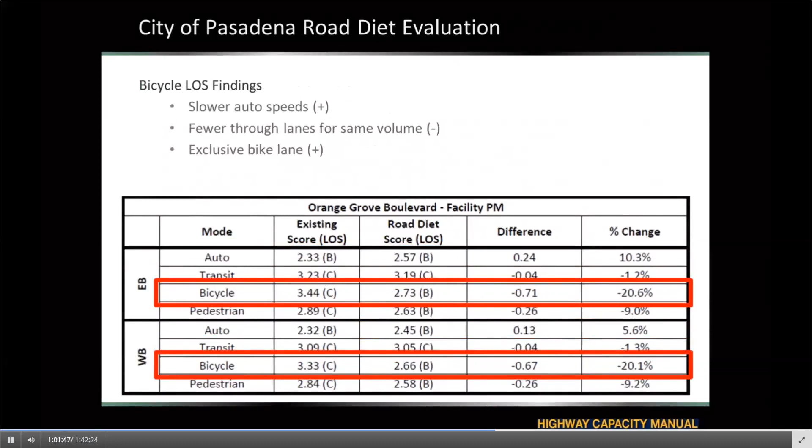As anticipated, the bicyclists showed the biggest improvement, going from level of service C to level of service B, which equated to about a 20% improvement to the perception score. The slower auto speeds and the exclusive bike lane were the primary drivers of this improvement, but the decrease in the number of through lanes did increase the number of vehicles in the lane closest to bicyclists, which had a slight negative effect on the actual score. It's still positive, and it would have been higher if we hadn't concentrated all the vehicles into the lane closest to the bicyclist.

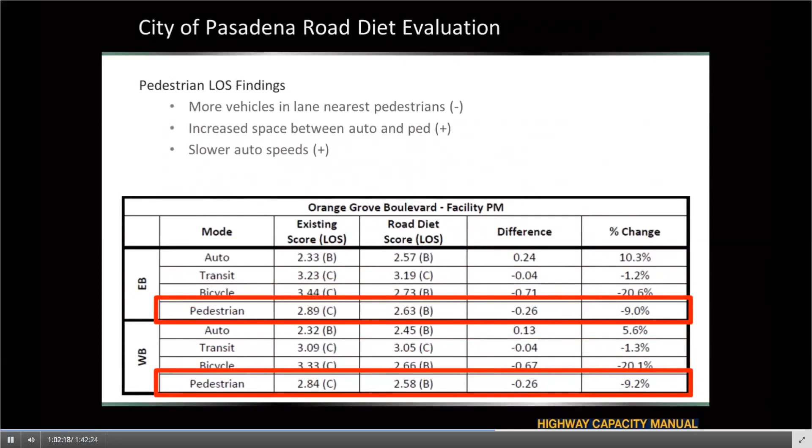Finally, the pedestrian experience on the corridor would also be improved by the road diet, with a decrease to the pedestrian score of about 9%. The slower auto speeds and increased separation between the vehicle and the pedestrian, due to now there being a bicycle lane between them and the sidewalk, was mainly responsible for this improvement. Similar to the bicycle mode though, the concentration of vehicles when we combined all the vehicles from two lanes into one, which is now closest to the pedestrians, did have a small negative effect.

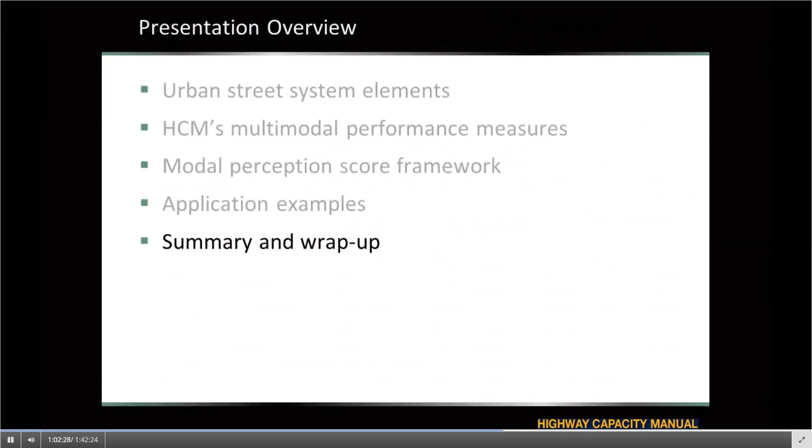Now we'll move into a brief summary and wrap up before answering any questions you might have on what we presented today.

As we demonstrated, the Highway Capacity Manual covers much more than highway capacity. The multimodal methods we touched on allow for analysis of motorists, pedestrians, bicyclists, and transit passengers together. These can be performed at a variety of levels, including the intersection, the roadway links between intersections, or a combination of the two. It is also important to note that no one tool or performance measure can really tell the whole story of various streets.

Other aspects such as safety, accessibility, and network connectivity must be considered. However, I believe the true strength of the HCM for multimodal analyses of urban streets is the ability to compare the four modes using a similar approach methodology, which will allow for a more quantitative assessment of what design choices will do to the various modes.

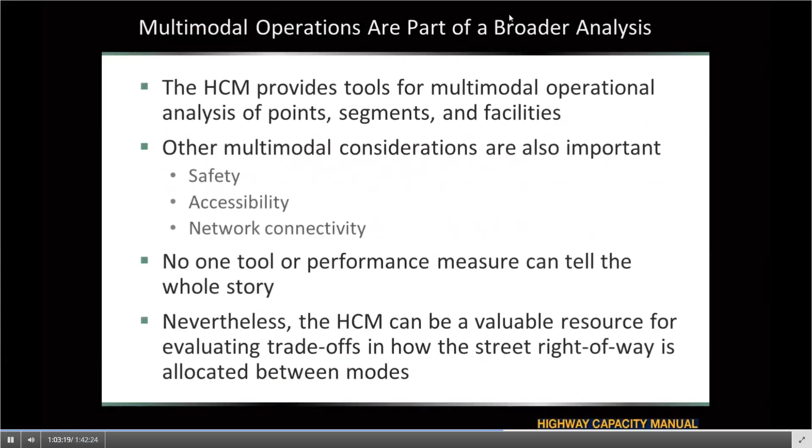While a significant amount of work has gone into these methods, these methodologies are continuing to be refined with subsequent releases of the Highway Capacity Manual and new research. Areas of improvement the committee is looking into for the next version of the HCM include incorporation of missing system elements. This would include having roundabouts, all-way stop signs, ramp terminals, or other alternative intersections as part of the analysis corridor. Currently, we can only really look at two-way stop and signalized intersections.

We're also looking into improving the pedestrian density methods to better meet the needs of our largest cities, such as New York. Really, density in New York is going to be far more of a driver of the pedestrian experience than whether there's a street tree or on-street parking.

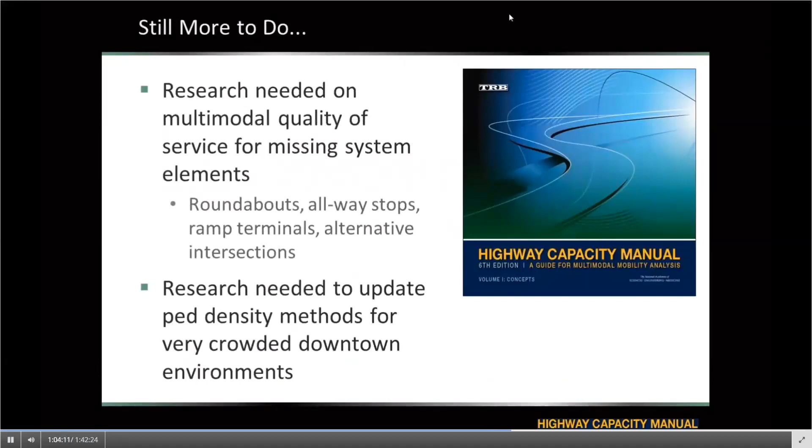Finally, we would also like to point out that the fourth volume of the Highway Capacity Manual, which can be found online for free, contains a number of useful resources that Paul was mentioning. NCHRP Report 616 documents the development of the multimodal methods, while the web-only document 158 goes into detail about those field tests and how the methodology was tested. TCRP Report 165 is the Transit Capacity and Quality of Service Manual, and it's a great tool if you are looking for more detailed analyses of performance measures for transit.

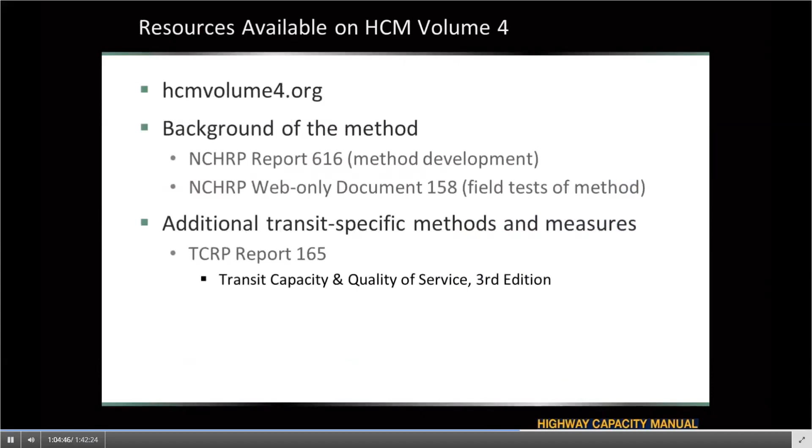And with that, we'll move into the questions section.